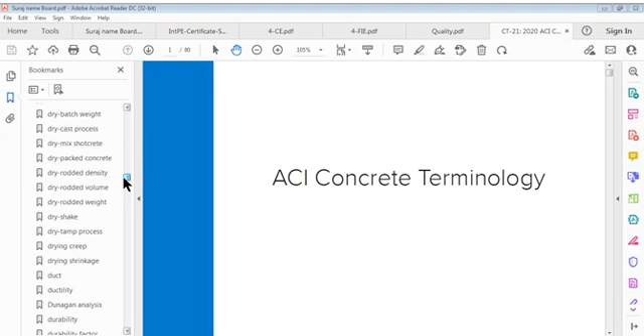And when we say reality of life, this means engineering itself is reality of life. And then this another file which is concrete terminology, ACI, American Concrete Institute, based on which here I have discussed many definitions. You will see on left side I am browsing in all these titles which have gone through, and we can say that these are important ones because we have been doing this, and I think it's very interesting copy of this document.

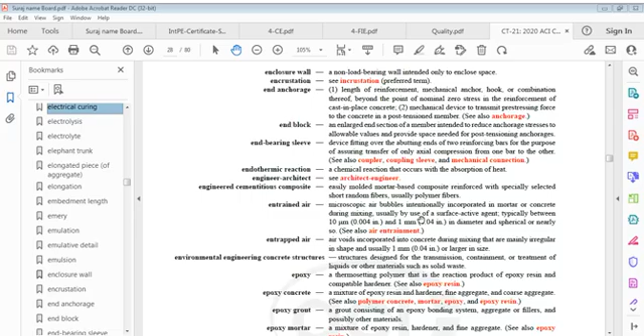Interesting in a sense that it should be known to all engineers who work on concrete. It's really, I can say, it's something we do not summarize, but it should be because it's related to only one material, and that is concrete. You know very well what I am talking of.

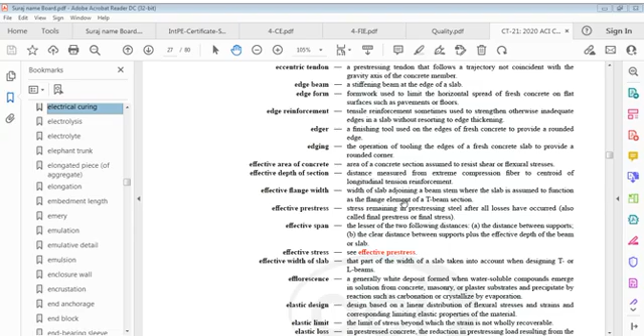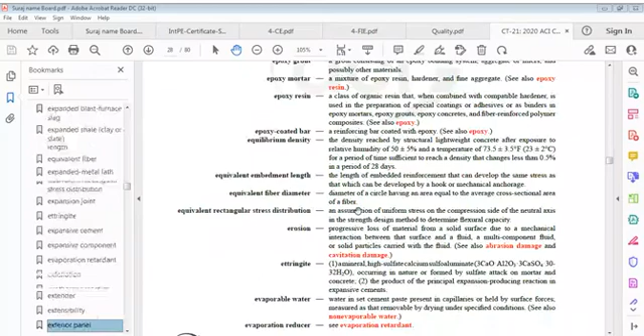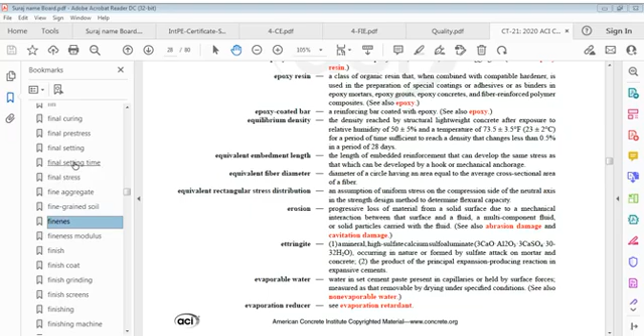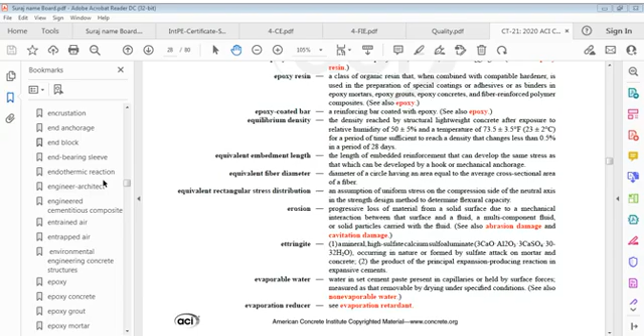Let's go back to the start of F, and we can say exposed aggregate finish, exposed glass, extender, extensibility, exterior panel. Actually, I forgot which page it was, and that's only problem. Let's say epoxy grout, entrapped air, encrustation, and we go up above that. And endothermic reaction, engineer architect, engineered cementitious composite.

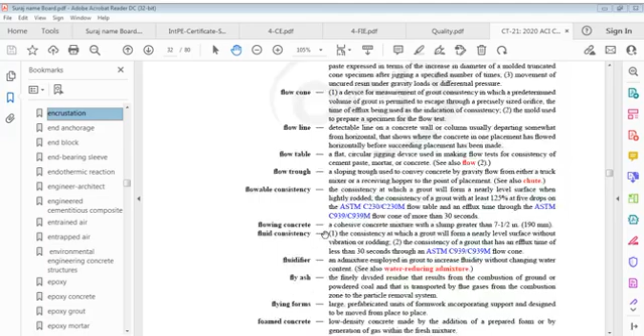And now we are on page of quality, which again is a big question mark as far as I'm concerned. I always try to give you something, I repeat my questions that are very related to quality, and these questions must be considered very seriously. We can't take them for granted.

For example, I say quality in our country, and where does that's my question, where does quality exist? We have to find coordinates of quality. In fact, to be very frank, though there is no coordinate, but if you have to understand something, we have to know. So let us say quality is a unit.

Let's consider like this. You got my point. Let's say quality is a unit, and we have to see where does it stay, or a person, where does it stay, where to find the address, or where to allow the address, we have to locate it, and that location doesn't exist anywhere, but we have to imagine that it exists somewhere.

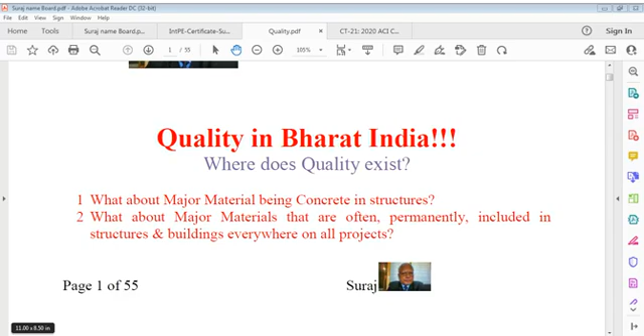This means very general questions that everybody can answer - you don't need engineering for that, no need. And we say, if you can answer these basic questions, we can say - what about engineering material being used to produce hundreds of parts of goods in manufacturing, because manufacturing is unlimited, processing is unlimited. I'm saying manufacturing - the processes mean something, of course more powerful than material, material manufacture.

If it's processing, it's in manufacture, in facilities, plant activities where you handle fossil fuels or certain gases, those processing activities are unlimited. Also construction is a process. So there is no limit or cover on processing definition or scope.

Then the question is, what provision is made by our governments, whatever government? Because when all these activities go on, there should be some control on that. Yes, there is technical control, that's right.

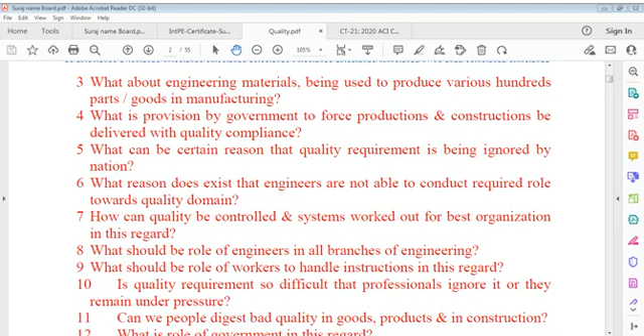Then we can ask, why do we digest bad quality in goods? That's another question. Can people digest bad quality in goods, products, and construction? And if we can digest that, what reason remains there? What reason forces us to digest a bad quality product?

Because on one end we say we have a system of quality organization. If we have a system, then we must know why we do not get products of general good quality. Meaning whatever product we deal with, all products should be quality oriented, or should be produced in a way quality mandates.

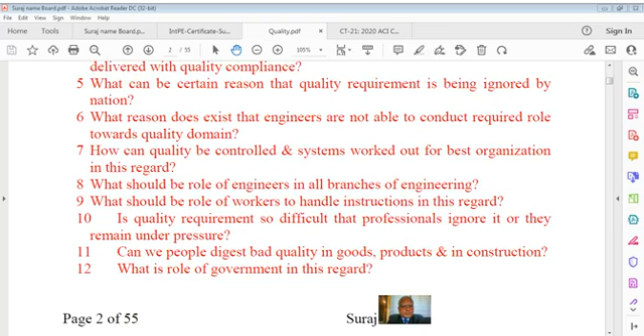Then the question is again, role of government. You cannot absolve government as far as material and products are concerned for the people of the country and the world. You cannot say no. Then what should be the role of customer, consumer, or end user in this relation? And this is the objective of this talk.

Role of customer, consumer, or end user in this regard - ultimately it's where you can say the buffer stop is seen. Customer or consumer or end user is where some termination comes in, here use of item starts, use of product starts. Only consumer can tell or define this experience which relates to manufacturer's process, manufacturer's product. And if a consumer is fine with that, whatever consumer knows about that, not everything but to some extent, can say consumer is a very important party to define acceptance or rejection of quality that has been proposed by manufacturer or by processor operator.

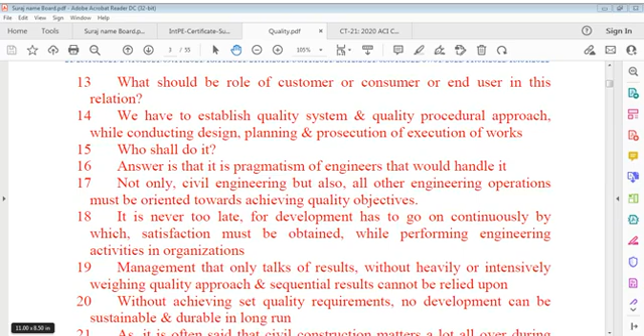Now controls or management, you can say, only talk of results. Without heavily or intensively weighing quality approach, and sequential results cannot be relied upon. You cannot simply waste your energy - the energy that's required towards implementation of quality, achievement of quality. Without achieving set quality requirements, no development can be made sustainable, and it cannot be durable at any time. We have to talk of results, and we have to consider that this result is not for one or two hours - this is for long hours. It depends - without achieving set quality requirements, no development can be sustainable and durable in the long run.

And it's often said that civil construction matters - it matters a lot throughout the total development scenario, where the civil engineer works as ab initio, you can say the first principle starter, and one should be proud of that - I'm a starter. The professional must be strong enough with determination and commitment to give quality as intended to be delivered with the product, so that other entrants may for sure follow suit, respecting other disciplines or branches. Engineers have to decide, to determine, even forever. We have to determine forever, we have to decide forever.

The quality cannot be taken for granted or compromised with, and that has to work for engineering demands and requirements. We cannot just think ourselves into it - when we deal with others, we deal with people. Of course, we can then say engineers have to decide to determine forever that quality cannot be taken for granted, and that has to work for engineering demands and requirements.

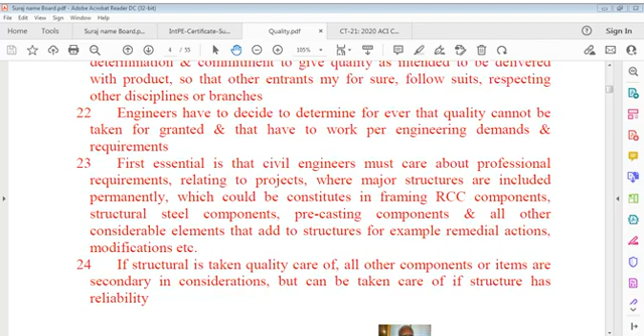If services are also included with structures, additional care must be resorted to for engineering coordination, because coordination work is kind of a specialization job on structures. It's also true that it's like a specialized job and additional expertise that every engineer does not possess, and no academic branch or subject teaches it. This is learnt only by experience and by involving oneself in multidisciplinary works without having any second thought.

Therefore, it is emphasized that coordination must be adopted as natural. This is relevant - it's learnt only if services also include the structures, additional care must be resorted to for engineering coordination, because coordination work is a specialized job on such structures, and it's like additional expertise that every engineer does not possess, and no academic branch or subject teaches it. This is learned only by experience and by involving self in designs, or knowing, or even if somebody knows, we cannot communicate it - you have to ask people.

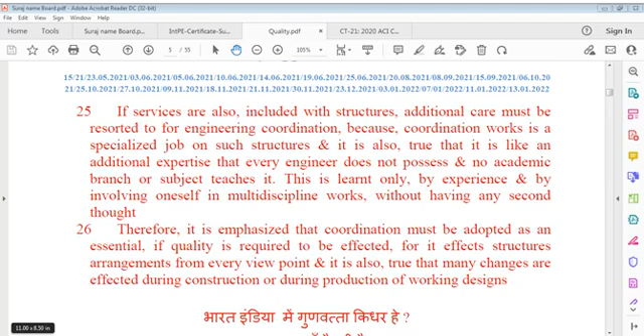It's emphasized that coordination must be adopted as essential if quality is required to be achieved, for it affects structures and arrangements from every viewpoint. It's also true that many changes are effected during construction or during production of working designs. We cannot stop at this discussion only - we have to consider every aspect of that in certain form.

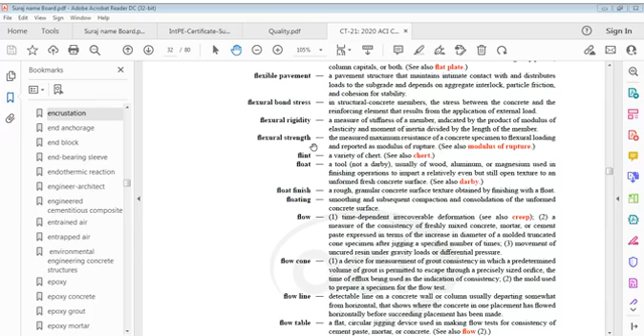When we think of quality and we think of concrete, we can say that we cover a major portion of concrete in our subjects, because ultimately designs are concrete, plannings are whatever we have to do - we have to go through complete detailing of includable materials from time to time. We have to learn certain terminologies, and we did that also.

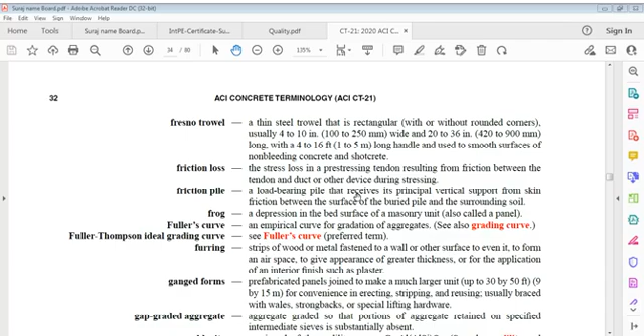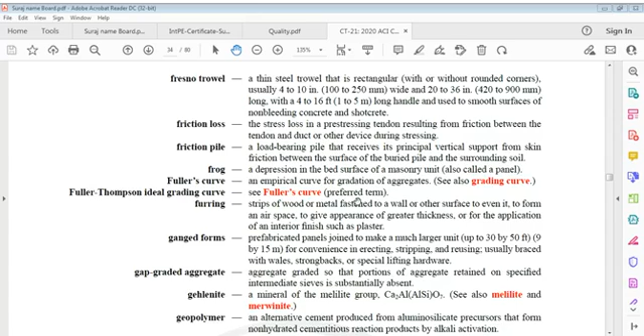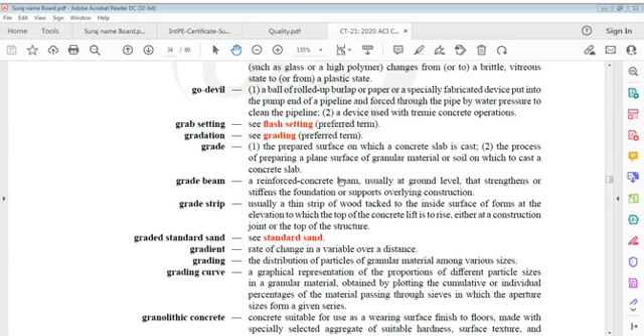Fly ash - there are so many terms in this. Free fall, fresh concrete, fresno trowel, friction loss, friction pile, frog, fuller curve - we have gone through all this. Go devil, and let's start with ganged forms, let's go to go devil, gradation, grade. Furring is, F here, strip of wood or mat fastened to a wall or other surface to even it. Fuller curve, frog, and Fuller Thompson ideal grading curve.

Furring, and now we can say ganged forms - I think we have gone through that also. Gap graded aggregate we've gone through. Gehlenite, mineral of the melilite group - Ca2Al(AlSi)O7 also. Geopolymer - alternative cement.

Geopolymer versus battery status - fully charged, I like to put it off for half an hour for the battery's life to be better, so that it works efficiently.

Some people complain that I always use English language during my talks. It's not my concern - language is not important, but for communication it is important. English, because generally documents are in English, generally. We have to take into consideration reality also - documents are in English and engineering is in English. But I'm not going to speak very difficult English while interacting with people, and in my work I don't use very difficult English, except when dealing with some contractual issues. There was a time when even in contracts, English was very difficult - if you read construction related contracts of the 90s, 80s, you would not be able to understand those.

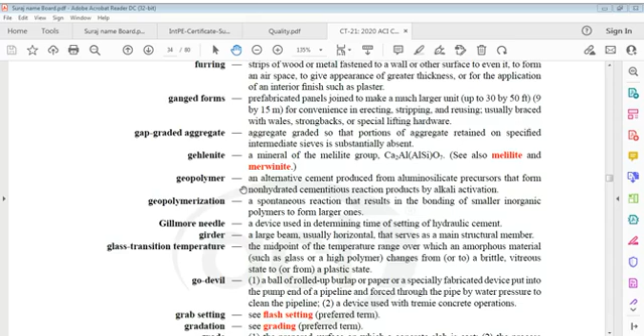Geopolymer, it's an alternative cement product, geopolymer. Let me blow it up further. So this one, geopolymer, an alternative cement produced from aluminosilicate precursors that form a non-hydrated cementitious reaction products by alkali activation.

Very important terminology, it is geopolymer. It is a cement, a kind of cement produced from aluminosilicate. This terminology maybe we have forgotten about - cement, an alternative cement produced from aluminosilicate precursors that form a non-hydrated cementitious reaction, produced by alkali activation, non-hydrated cementitious reaction.

Again I say, geopolymer. It is an alternative cement produced from aluminosilicate precursors that form non-hydrated cementitious reaction products by alkali activation. Inorganic polymers to form larger ones.

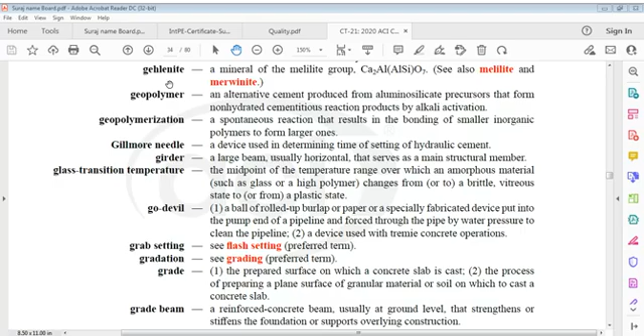Sometimes I repeat things for the purpose of additional explanation, because generally we forget all these things sometimes in life, and it's better to refresh every time. If you have the same information, or more information than was previously available, you can convert your life into a session of learning, not debate but learning, and it can be written or spoken. Learning has every procedure. That much you should realize.

Grading, standard sand, we have gone through that. Flash setting, gradation, grade. Now grade - it can also be grade slab, or grade beam.

A grade slab is the prepared surface on which a concrete slab is cast - the process of preparing a plane surface of similar material, granular material or soil on which the slab is cast, is called grade slab.

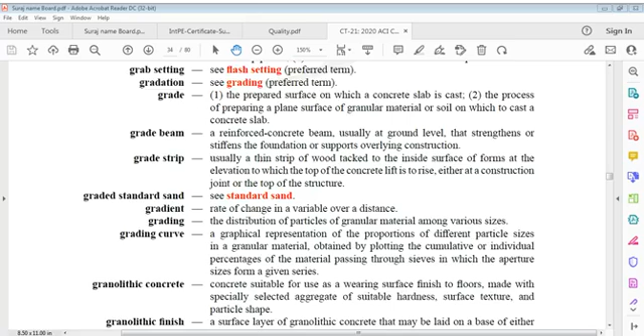Granolithic concrete: concrete suitable for use as a wearing surface finish to floors, made with specially selected aggregates of suitable hardness, surface texture, and particle shape.

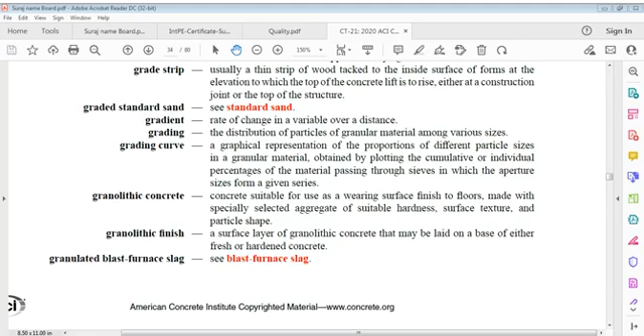Granulated blast furnace slag we have already seen. Now, gravel. These are simple terms sometimes, but we have to consider them in effect.

It's very cold here. I don't know what to do. Let me wear my shoes, it's better. I'm feeling cold from my legs and feet, I don't know why, maybe the season. At least you have to protect yourself, I don't want to fall prey to the weather, because it's dangerous, we shouldn't take risks. So I wore my shoes for better comfort. Okay sorry gentlemen, it's the weather.

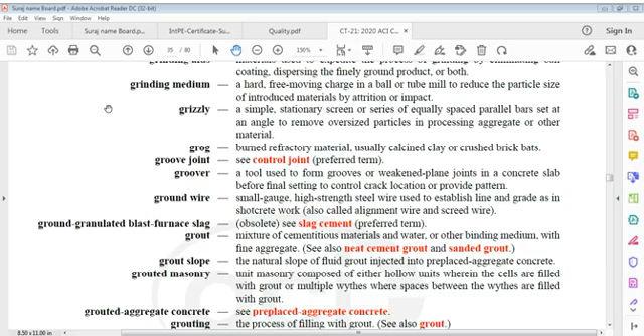Grout slope: natural slope of fluid grout injected into preplaced aggregate concrete. Grouted masonry: composed of hollow units wherein cells are filled with grout, or multiple wythes where the space between wythes is filled with grout. Grouted aggregate concrete.

Grouted aggregate concrete, preplaced aggregate concrete, and grouting. Grouting is the process of filling with grout. A gun is shotcrete delivery equipment, a pressure cylinder used to propel freshly mixed concrete pneumatically.

Gun finishing: undisturbed final layer of shotcrete applied from the nozzle without hand finishing. Gunite is a proprietary term for shotcrete. Gunman: worker on a shotcrete crew who operates delivery equipment. Gunning: act of applying dry mix shotcrete.

Gypsum is a mineral having the composition calcium sulfate dihydrate, CaSO4·2H2O. Gypsum plaster is made with plaster of Paris. Hairline crack: a concrete surface crack with a width so small as to be barely perceptible.

Hairline crack: a concrete surface crack with a width so small as to be barely perceptible. Hairpin is a wedge used to tighten some types of form ties.

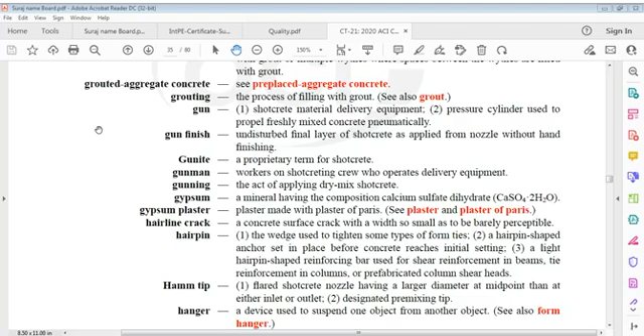Hamm tip: a flared shotcrete nozzle having a large diameter at midpoint, then tapering at either the inlet or outlet, designated the premixing tip.

A hanger is a device used to suspend one object from another. Hard burned lime is the product of heating limestone to a temperature sufficient to change calcium carbonate to calcium oxide, which can undergo expansion when it slowly reacts with water. Hardened concrete has developed sufficient strength to serve a defined purpose or resist stipulated loading without failure.

Hardener: a chemical including certain fluosilicates or sodium silicate applied to concrete floors to reduce wear and dusting; in a two-component adhesive or coating, the chemical component that causes the resin component to cure.

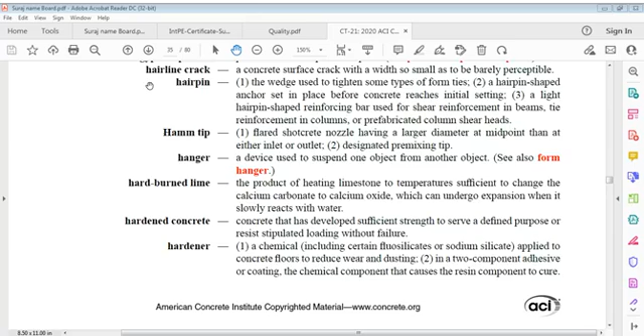I think these were all previously also done, but I'm just doing a refreshing study for a couple of minutes so that we can understand very well what we did.

Hardening: gain of strength and other properties of a cementitious mixture as a result of hydration after final setting.

Hardy cross method is a moment distribution method. We know that - we have gone through this in theory of structures.

Harp tendons, draped tendons, and harsh mixture: a concrete mixture that lacks desired workability due to a deficiency of mortar or aggregate fines.

Haunch: a deepened portion of a beam in the vicinity of a support. A hawk is a tool used by plasterers to hold and carry plaster or mortar - generally a flat piece of wood or metal approximately 0.25 to 0.3 meters square with a wooden handle centered and fixed to the underside.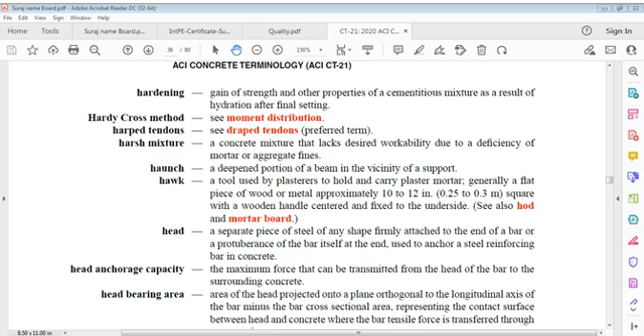Head anchorage capacity: maximum force that can be transmitted from the head of a bar to surrounding concrete. Head bearing area...

Area of head projected onto a plane orthogonal to the longitudinal axis of the bar, minus the bar cross-sectional area, representing the contact surface.

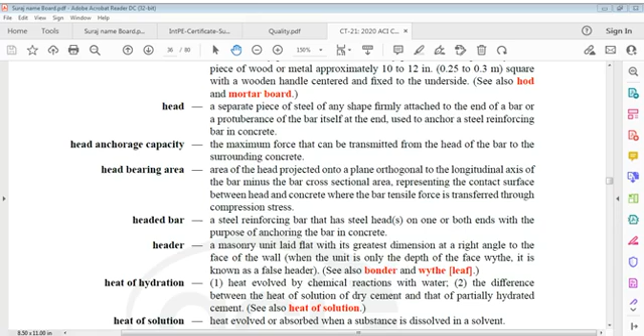We have to see head bearing area - that's okay, then we can repeat it: area of head projected onto a plane orthogonal to the longitudinal axis of the bar, minus bar cross-sectional area, representing the contact surface between head and concrete, where bar tensile force is transferred through compression stress.

Headed bar: a steel reinforcing bar that has steel heads on one or both ends with the purpose of anchoring the bar in concrete. Header: a masonry unit laid flat with its greatest dimension perpendicular to the face of the wall, as in ordinary concrete masonry.

We have header, as we said before, a masonry unit laid flat with its greatest dimension at right angle to the face of the wall. Where the unit is only the depth of the face wythe, it is known as a false header.

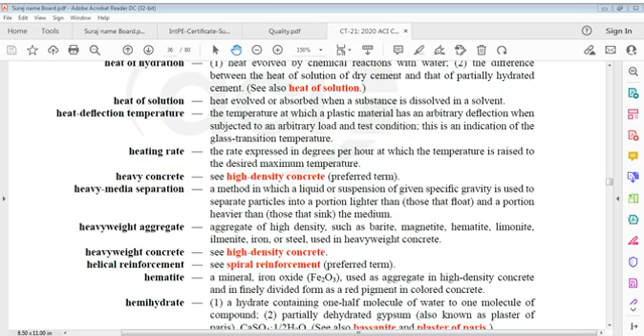Heavy concrete, high density concrete, and heavy media separation: a method in which a liquid or suspension of a given specific gravity is used to separate particles into a portion lighter than those that float, and a portion heavier than those that sink.

Heavy weight aggregate. Heavy media separation is also a very important point; we separate using a method in which a liquid suspension of a given specific gravity is used to separate particles into portions.

Heavyweight concrete is high density concrete, and helical reinforcement is spiral reinforcement.

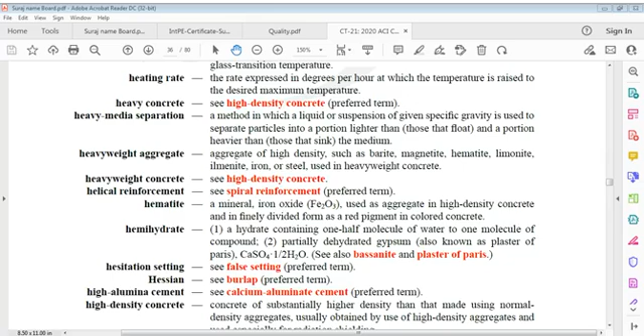Hematite, Fe2O3, used as aggregate in high density concrete, and in finely divided form as a red pigment in colored concrete.

Hemihydrate: a hydrate containing 1/2 molecule of water to 1 molecule of compound; partially dehydrated gypsum, also known as plaster of Paris, CaSO4 half H2O. See also bassanite and plaster of Paris.

Hesitation setting is false setting. Hessian is burlap. High alumina cement is calcium aluminate cement.

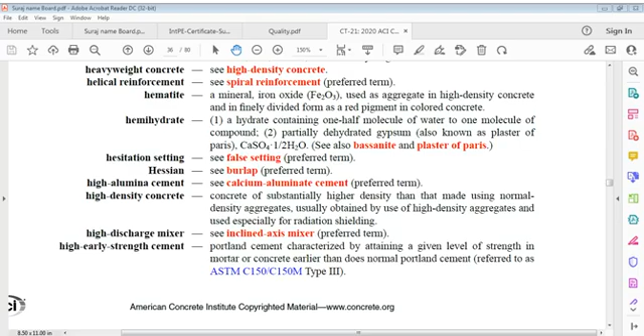High density concrete: concrete of substantially higher density than that made using normal density aggregate, usually obtained by use of high density aggregates and used specially for radiation shielding.

High discharge mixer, also called inclined axis mixer.

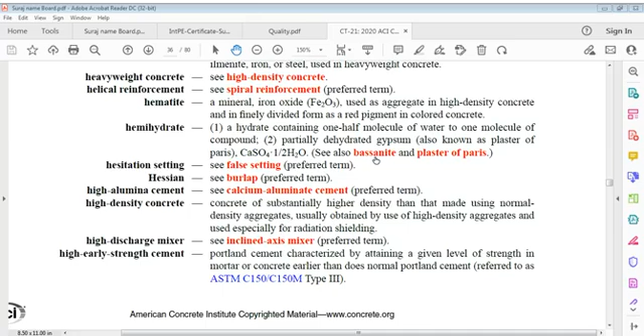High early strength cement: Portland cements characterized by attaining a given level of strength in concrete earlier than normal cements imply. We can call this high early strength concrete.

High fineness cement: a hydraulic cement of substantially higher specific surface and substantially smaller mean particle diameter than typical for products of similar composition, produced by additional grinding or by separation by particle size.

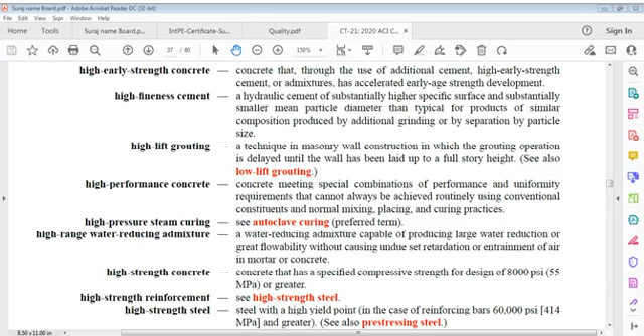Then here is high-strength concrete that has a specified compressive strength for design of 55 MPa or greater. High-strength reinforcement is high-strength steel, steel with a high yield point. High strength concrete is concrete that has a specified compressive strength beyond 55 MPa, and high strength reinforcement is high strength steel.

High strength steel is steel with high yield point. In case of reinforcement, it is 414 MPa and greater. High pressure steam curing means we have already seen autoclaving. A hod is a V-shaped trough or tray.

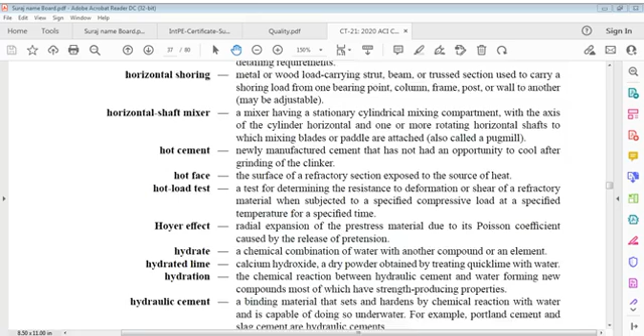Now here is honeycomb. We have gone through Hooke's law, hoop iron, horizontal shoring, and we have to go to horizontal shaft mixer, hot cement, hot face. We've gone through all this, and now we go to hydraulics.

Hydraulic concrete structures such as dams, spillways, and bridge abutments are designed to resist erosion caused by cavitation.

Hydraulic concrete structures, such as dams, spillways, and bridge abutments, are designed to resist erosion caused by cavitation, abrasion, or chemical reactions.

Hydraulic hydrated lime is a hydrated dry cementitious product obtained by calcining limestone containing silica and alumina to a temperature short of incipient fusion, so as to form sufficient free calcium oxide to permit hydration, while at the same time.

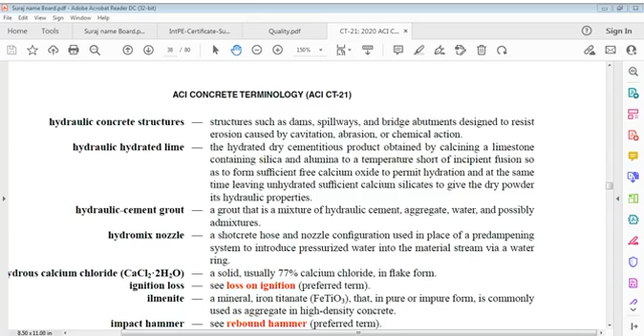Hydromix nozzle. We have to go to ignition loss. Ilmenite is a mineral term, FeTiO3, that in pure or impure form is commonly used as aggregate of high density concrete. It's an important term.

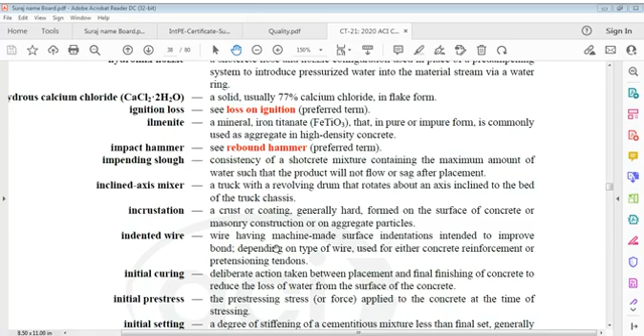Ilmenite, we can say here, is iron titanate FeTiO3, that in pure or impure form is commonly used as aggregate of high density concrete.

Impact hammer is a rebound hammer. Impending slough is consistency of a shotcrete mixture containing maximum amount of water such that the product shall not flow, sag, or slump after placement.

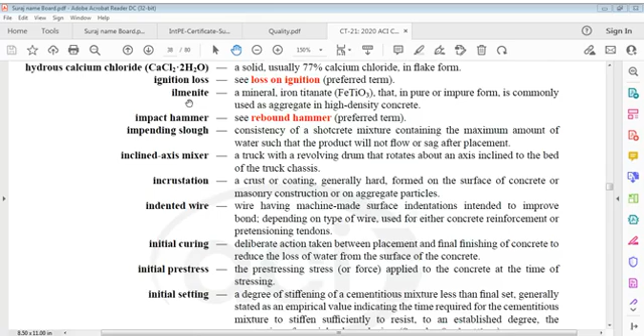Inclined axis mixer is a transit mixer type, a truck with a revolving drum that rotates about an axis inclined to the bed of the truck chassis. Incrustation is a crust or coating, generally hard, formed on the surface of concrete or masonry construction, or on an aggregate particle.

Indented wire has machine-made surface indentations intended to improve bond, depending on the type of wire.

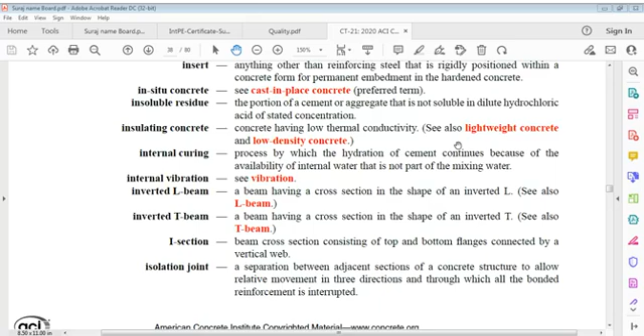You can say insoluble residue, internal curing, we'll look into that. Jacking device used to... we have come to J now. Okay, jacking device, so that means internal curing. Also, an important point here we have to see - it's sometimes important to think of that.

I have to just see internal curing, it's an important one. Internal curing concrete - you can say it's a relatively recent technique that has been developed to prolong cement hydration by providing internal water reservoirs in a concrete mixture, reservoirs that do not adversely affect the concrete mixture's fresh or hardened physical properties.

What does it mean? Internal curing helps concrete realize its maximum potential in a simple, economical, and sustainable way, and I see it improves hydration. It is in the lecture, let me just note this.

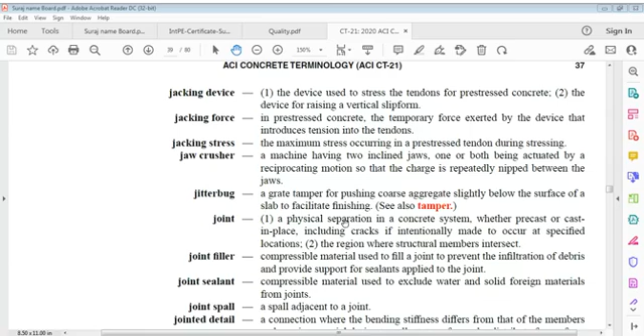Now, the term J: we start with jacking device. Jacking device: a device used to stress tendons for pre-stressed concrete, or a device for raising a vertical slip form. Slip form, for example, is used when casting a large structure like an LNG tank, about 50 meters high and 80 meters in diameter, with 800 mm thick walls. Continuous concrete is required, so the jacking device is used for a slip form, allowing continuous jumping of the forms.

Jacking force, in pre-stressed concrete, is the temporary force exerted by a device that introduces tension into tendons. Jacking stress is the maximum stress occurring in a pre-stressed tendon during stressing.

Jaw crusher: a machine having two inclined jaws, one or both being actuated by a reciprocating motion so that the charge is repeatedly nipped between the jaws.

Jitterbug, a grate tamper used for pushing coarse aggregate slightly below the surface of a slab to facilitate finishing.

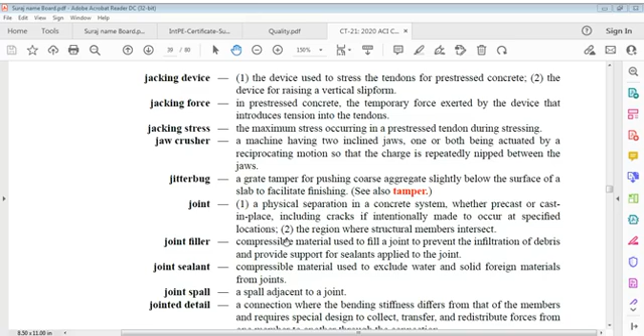Joint, a physical separation in a concrete system, whether precast or cast in situ or cast in place, including cracks if intentionally made to occur at specified locations, the region where structural members intersect, and joint filler. Joint filler is a compressible material used to fill a joint to prevent infiltration of debris and provide support for sealant applied to the joint.

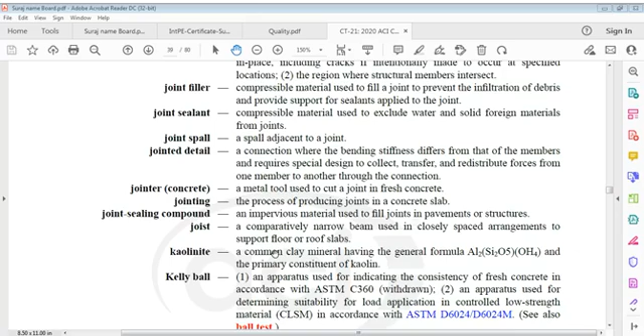Joist is a comparatively narrow beam used in closely spaced arrangements to support a floor or roof slab.

Kaolinite, a common clay mineral having the general formula Al2Si2O5(OH)4, and the primary constituent of kaolin.

Kelly ball, apparatus used for indicating consistency of fresh concrete in accordance with ASTM C360 (withdrawn), and apparatus used for determining suitability for load application in controlled low strength material (CLSM) in accordance with ASTM D6024/D6024M.

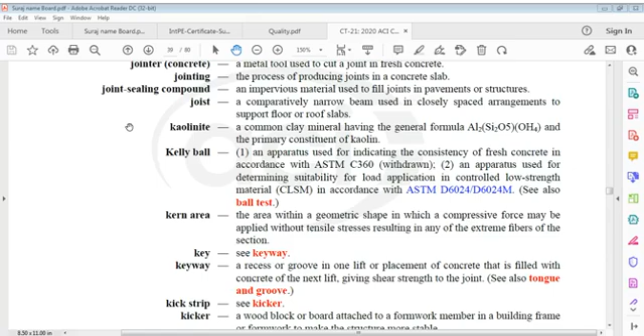Kern, area within a geometric shape in which a compressive force may be applied without tensile stresses resulting in any of the extreme fibers of a section.

Keyway, a recess or groove in one lift or placement of concrete that is filled with concrete of the next lift, giving shear strength to the joint.

Kicker, a wood block or board attached to formwork or a member in a building frame to make the structure more stable.

Kiln, a furnace or oven for drying, charring, hardening, baking, calcining, sintering or burning various materials.

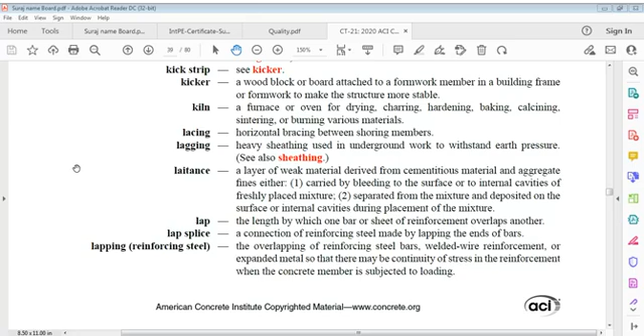Lap splice, a connection of reinforcing steel made by lapping ends of bars. Lapping reinforcing steel: overlapping of reinforcing steel bars, welded wire reinforcement, or expanded metal so that there may be continuity of stress in the reinforcement when the concrete member is subjected to loading.

Lateral reinforcement, transverse reinforcement usually applied to ties, hoops or spirals used to enclose reinforcement in columns or column-like members.

Latex, a dispersion of organic polymer particles in water.

Latex: a dispersion of organic polymer particles in water.

L beam: a beam having a cross section like L, a beam having a ledge on one side only. Lean concrete: concrete of low cementitious material content. Ledger: a member with a protrusion or protrusions that support other structural members.

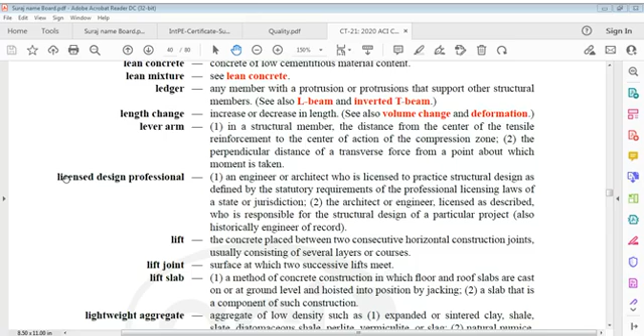Licensed design professional: an engineer or architect who is licensed to practice structural design as defined by statutory requirements of professional licensing laws of a state or jurisdiction.

An architect or engineer licensed as described, who is responsible for structural design of a particular project, historically called engineer of record. Lift: concrete placed between two consecutive horizontal construction joints, usually consisting of several layers of concrete.

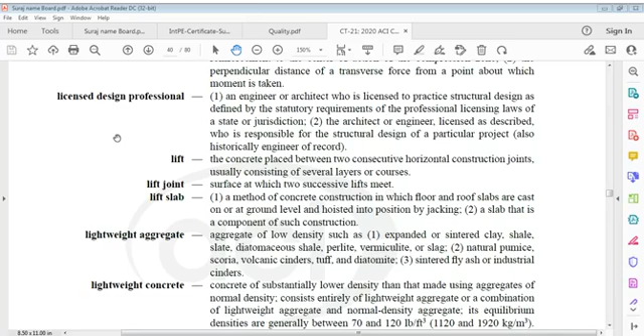Lift joint: the surface at which two successive lifts meet. Lift slab: a method of concrete construction in which floor and roof slabs are cast on or at ground level and hoisted into position by jacking; a slab that is a component of such construction.

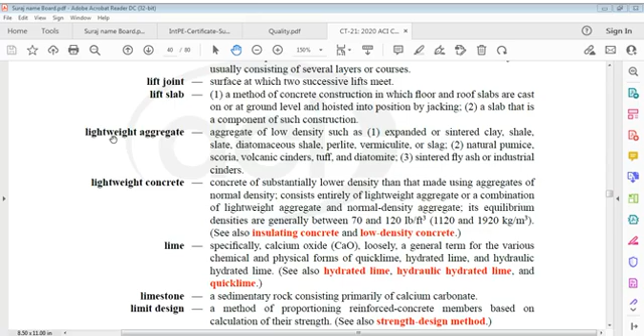Lightweight aggregate: aggregate of low density, such as expanded or sintered clay, shale, slate, diatomaceous shale, perlite, vermiculite or slag, natural pumice, scoria, volcanic cinders, tuff and diatomite, sintered fly ash or industrial cinders.

Expanded or sintered clay, shale, slate, diatomaceous shale, perlite, vermiculite or slag, natural pumice, scoria, volcanic cinder, tuff and diatomite, sintered fly ash, industrial cinder.

Lightweight concrete: concrete of substantially lower density than concrete made using aggregate of normal density, consisting entirely of lightweight aggregate or a combination of lightweight aggregate and normal density aggregate. Its equilibrium densities are generally between 1120 and 1920 kilograms per meter cube. There is also insulating concrete and low density concrete.

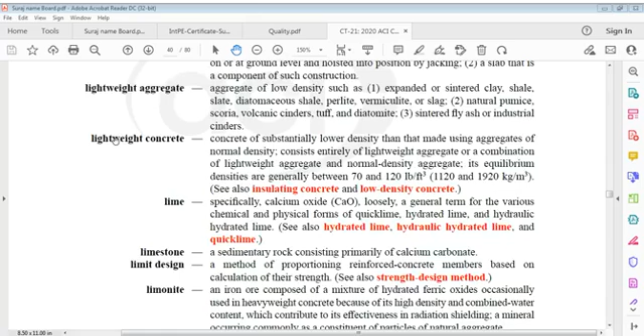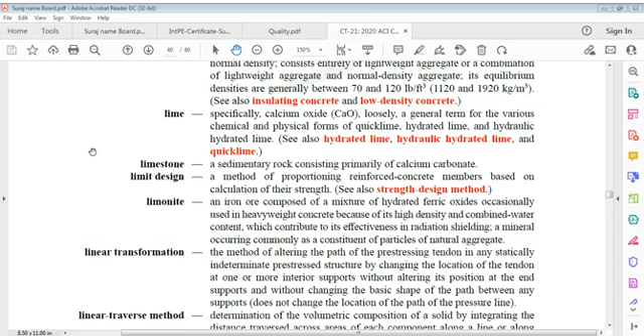Limestone: sedimentary rock consisting primarily of calcium carbonate. Limit design: a method of proportioning reinforced concrete members based on calculation of their strength.

Limonite: an iron ore composed of a mixture of hydrated ferric oxide. Occasionally used in heavyweight concrete because of its high density and combined water content, which contribute to its effectiveness in radiation shielding, a mineral occurring commonly as a constituent of particles of natural aggregate.

Limonite: an iron ore composed of a mixture of hydrated ferric oxide, occasionally used in heavyweight concrete because of its high density and combined water content, which contribute to its effectiveness in radiation shielding, a mineral occurring commonly as a constituent of particles.

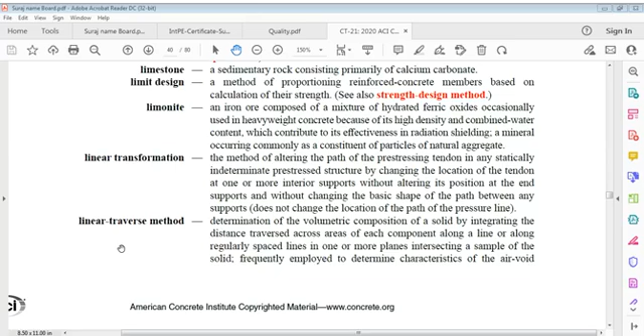Linear traverse method is determination of volumetric composition of a solid by integrating a distance traversed across areas of each component along a line or along regularly spaced lines in one or more planes intersecting a sample of solid, frequently employed to determine characteristics of air void system in hardened concrete by microscopical examinations along a series of traverse lines on a finely ground section of concrete.

Lining: sheet, plate or layer of material attached directly to inside face of formwork to improve or alter surface texture and quality of finished concrete. May be called form lining, tunnel lining or sheathing.

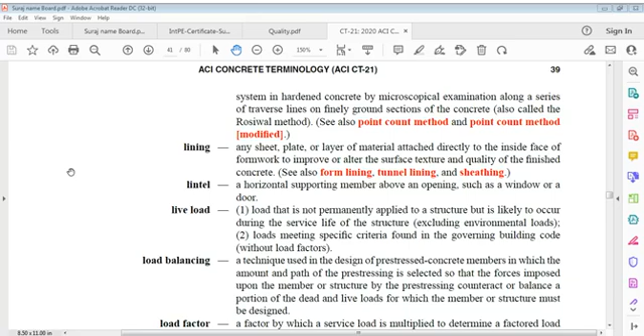Lintel: a horizontal supporting member above an opening such as a window or door. Live load: a load that is not permanently applied to a structure but is likely to occur during the service life of the structure, excluding environmental loads, meeting specific criteria found in the governing building code without load factors.

Load balancing: a technique used in design of pre-stressed concrete members, in which the amount and path of pre-stressing is selected so that the force imposed upon the member or structure by pre-stressing counteracts or balances a portion of dead and live loads for which the member or structure must be designed.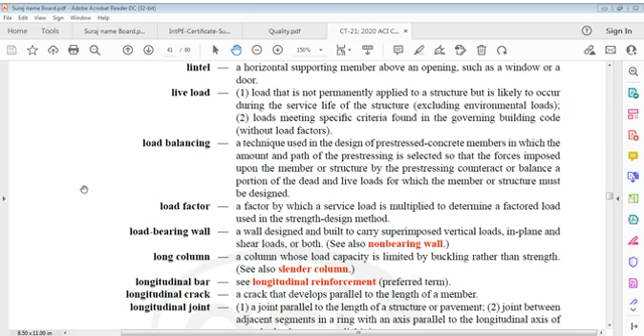Load bearing wall: designed and built to carry superimposed vertical loads in plane and shear loads, or both. Long column: a column whose load capacity is limited by buckling rather than strength.

Longitudinal bar, longitudinal reinforcement, and longitudinal crack: a crack that develops parallel to the length of a member.

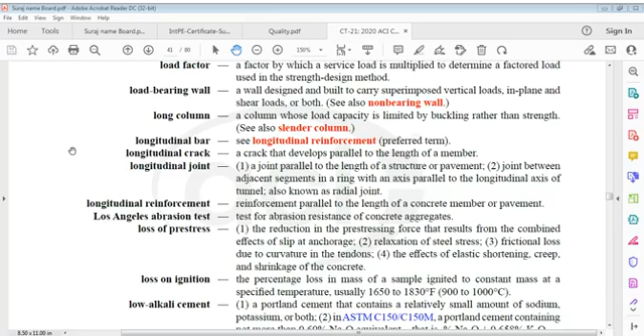Longitudinal joint: a joint parallel to the length of a structure or pavement. Joints between adjacent segments on a ring with an axis parallel to the longitudinal axis of a tunnel, also known as a radial joint. Longitudinal reinforcement: reinforcement parallel to the length of a concrete member or pavement. Los Angeles abrasion test: for abrasion resistance of concrete aggregate.

Loss of pre-stress: reduction in pre-stressing force that results from the combined effect of slip at anchorage, relaxation of steel stress, and frictional loss due to curvature of tendons, plus the effects of elastic shortening, creep, and shrinkage of concrete.

Loss of pre-stress: reduction in pre-stressing force that results from a combined effect of slip at anchorage, relaxation of steel stress (that is, reduction of steel stress), frictional loss due to curvature of tendons, and the effect of elastic shortening, creep and shrinkage of concrete. Loss on ignition: percentage loss in mass of a sample ignited to constant mass at a specified temperature, usually 900 to 1000 degrees Celsius.

Low alkali cement: a Portland cement that contains a relatively small amount of sodium, potassium, or both, per ASTM C150 and C150M.

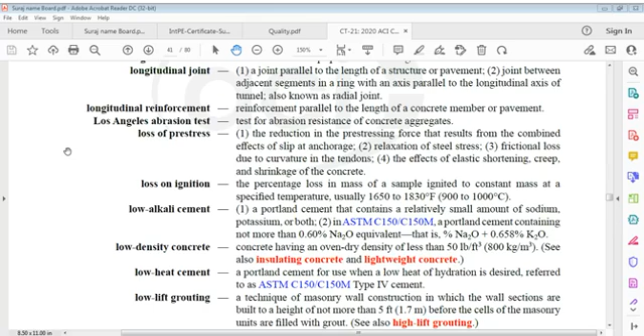Low heat cement: a Portland cement for use when low heat of hydration is desired. Refer to ASTM C150, C150M type 4 cement.

Low lift grouting: a technique of masonry wall construction in which wall sections are built to a height of not more than 1.7 meters before the cells of masonry units are filled with grout.

Low lift grouting, low pressure steam curing (atmospheric pressure steam curing), and low strength materials. Low lift grouting is a technique for masonry walls, built up to 1.7 meters before cells are grouted. Low pressure steam curing is atmospheric pressure steam curing.

Machine base grout: grout that's used in the space between plates of machinery and underlying foundation, expected to maintain complete contact with the base and to maintain uniform support.

Macro fiber: a fiber with equivalent diameter greater than 0.3 millimeter for use in concrete.

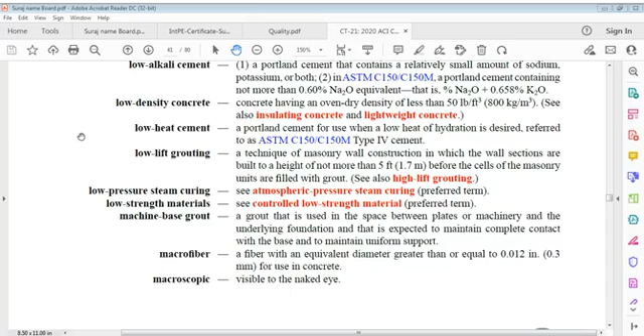A fiber with an equivalent diameter greater than 0.3 mm for use in concrete is macroscopic, visible to the naked eye.

I'll go upstairs just for 5 minutes, come back.

Meanwhile, magnetite - we are now in M. Magnetite, a mineral, ferrous ferric oxide, FeO, Fe2O3, principal constituent of magnetic black iron ore, with a density of approximately 5.2 g per cc and Mohs hardness of approximately 6, that is used as an aggregate in high density concrete.

There was limonite we talked about, now magnetite.

Manufactured sand. Map cracking: intersecting cracks that extend below the surface of hardened concrete that vary in width from fine and barely visible to open and well defined, called pattern cracking.

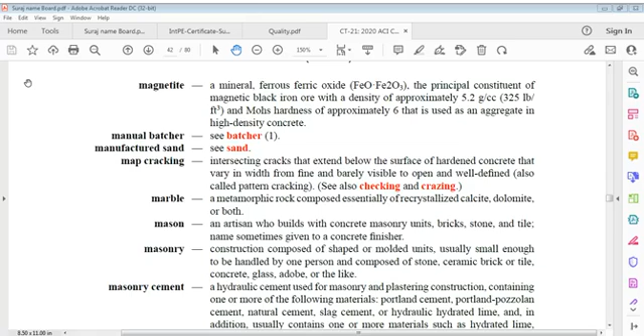Mason is the artisan who builds with concrete masonry unit, bricks, stone, and tile - a name sometimes given to a concrete finisher. Masonry: construction composed of shaped or molded units, usually small enough to be handled by one person, composed of stone, ceramic, brick or tile, concrete, glass, adobe,

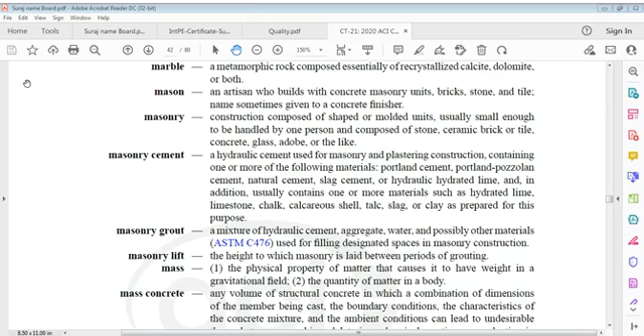or likewise. Masonry cement, a hydraulic cement used for masonry and plastering construction, containing one or more of the following materials: Portland cement, Portland pozzolan cement, natural cement, slag cement, hydraulic hydrated lime, and in addition usually contains one or more materials such as hydrated lime, limestone, chalk, calcareous shells, etc., talc, slag, or clay as prepared for this purpose.

Let me go and come back better, just for 5 minutes, or better in that case.

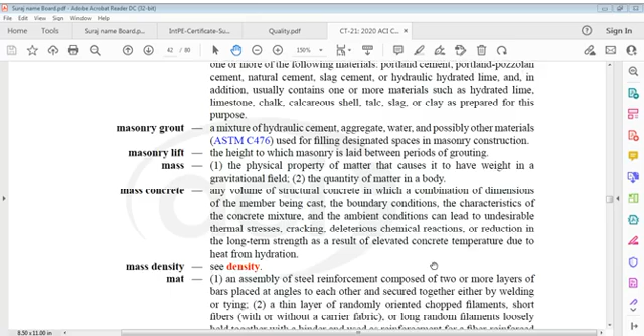Mass is a physical property of matter that causes it to have weight in a gravitational field, quantity of matter in a body. Mass concrete: volume of structural concrete

in which a combination of dimensions of the member being cast, boundary conditions, characteristics of the concrete mixture, and ambient conditions can lead to undesirable thermal stresses, cracking, deleterious chemical reactions, or reduction in long-term strength as a result of elevated concrete temperature due to heat from hydration.

I repeat, mass concrete or massive concrete, in fact we should say, is the volume of structural concrete in which a combination of dimensions of the member being cast, boundary conditions, characteristics of the concrete mixture, ambient conditions can lead to undesirable thermal stresses, cracking, deleterious chemical reactions, or reduction in long-term strength as a result of elevated concrete temperature due to heat from hydration.

Mat: assembly of steel reinforcement composed of two or more layers of bars placed at angles to each other and secured together either by welding or tying. A thin layer of randomly oriented chopped filaments, short fibers, or long random filaments loosely held together with a binder and used as reinforcement for a fiber reinforced polymer composite material.

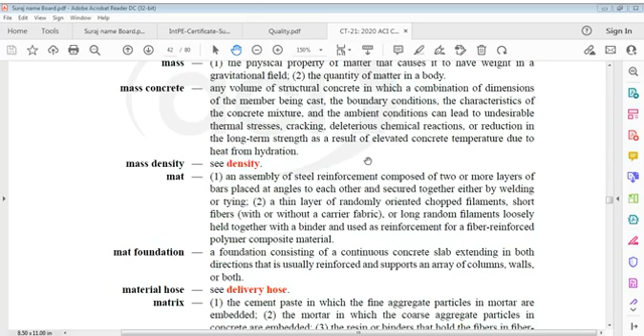by a matrix - cement paste in which fine aggregate particles in mortar are embedded, mortar in which coarse aggregate particles in concrete are embedded, resin or binders that hold fibers in fiber reinforced polymer together, transfer loads to fibers and protect them against environmental attack and damage due to handling.

Matrix: the cement paste in which fine aggregate particles in mortar are embedded; the mortar in which coarse aggregate particles in concrete are embedded; and the resin or binder that holds fibers in fiber reinforced polymer together, transfers load to fibers, and protects them against environmental attack and damage due to handling.

Maturity factor: a function of the age of concrete in hours or days multiplied by the difference between the mean temperature of concrete during curing and the datum temperature, below which hydration stops. Also called temperature-time factor. Maximum size of aggregate in specifications: the smallest sieve opening through which the entire amount of aggregate is required to pass. Mean stress: the average of maximum and minimum stress in one cycle of fluctuating load.

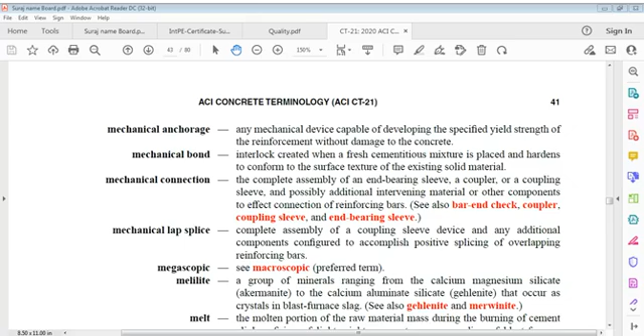Mechanical connection: the complete assembly of an end bearing sleeve, a coupler or coupling sleeve, and possibly additional intervening material or other components to effect connection of reinforcing bars. And mechanical lap splice.

Mechanical connection, as defined for mechanical lap splice: the complete assembly of a coupling sleeve device and additional components configured to accomplish positive splicing of overlapping reinforcing bars.

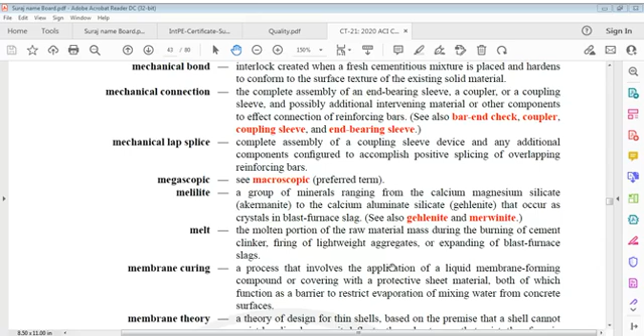Membrane curing: a process that involves application of a liquid membrane-forming compound or covering with a protective sheet material, both of which function as a barrier to restrict evaporation of mixing water from the concrete surface.

Membrane theory: a theory of design for thin shells based on the premise that a shell cannot resist bending because it deflects. Therefore, the only stresses that exist in any section are shear stress and direct compression or tension.

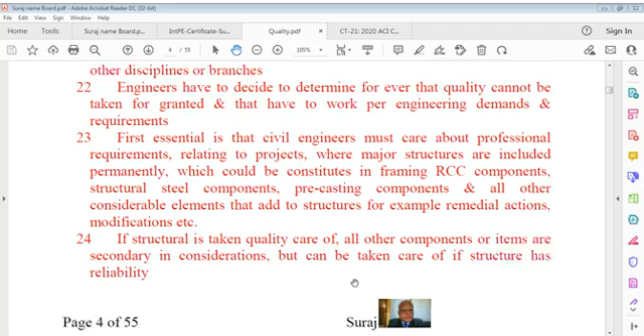Now, this is page 43. I think we have gone a good way today, and we shall continue ourselves on this without any problems in future. We also have to think about what I said in this talk about quality, quality in Bharat, India, that's what I said. And also this page 43, we can cover next time. With this, I think we should pass thanks to all of you, exactly in a way we have gone through certain requirements.

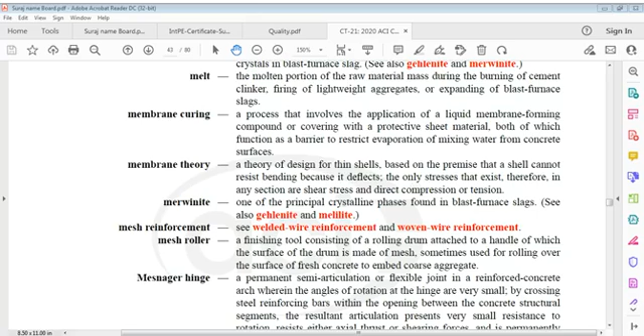I hope this very technical talk would continue. Still more pages are there, and I'd like to share this information with you, though you may have this, but people are not interested in all this. For example, we find a term, internal curing, or reservoir curing, and also so many other terms which are really very useful. Should we consider how to apply it? Maybe we don't apply that here, but knowledge is interesting. As I said, we talked about various types of curing: radiation curing, steam curing, or electrical curing. Same way, here is reservoir curing or internal curing. All these are very interesting topics, so if we have more literature on them, we can continue to talk about them. It's a good way to learn more, and that's what's required. So thank you very much, I think we should now go.